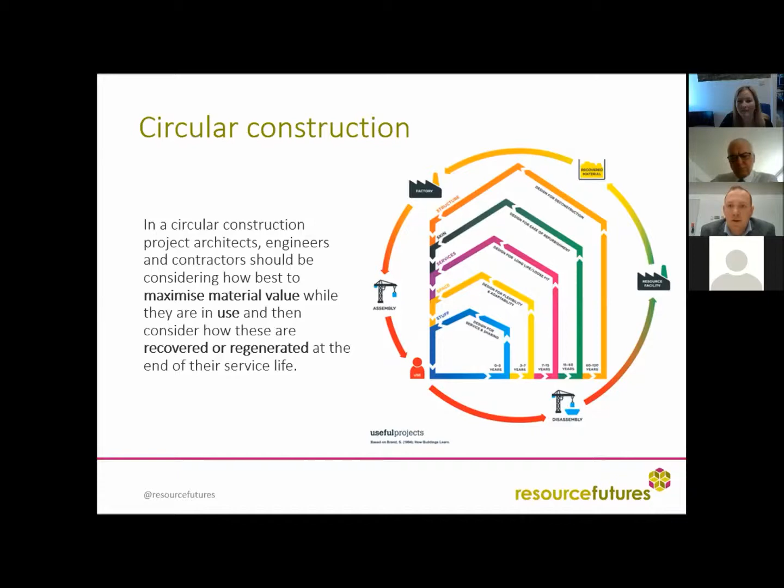Now, I could put up the standard butterfly diagram of circular economy, but I think probably everyone's seen that to death. But the message from that is recycling is considered to be the worst scenario, which is unusual. We normally think of that as something we should be striving for. But in a circular economy, recycling is almost the baseline. That's where we should be aiming to start as our fallback. Then we're looking at how can we recover that into a second life material? How can we repair it so that it continues within its existing life? And can it be reused in its current format as well? So that's moving up the waste hierarchy. And there are different opportunities for different materials and different layers in a building. So there is no single solution, unfortunately.

Why do we need it? Well, to quote Jan Poletsky of International Solid Waste Association, the 20th century has been the great acceleration period. Our population growth has been by a factor of 3.7. Our annual extraction of construction materials grew by a factor of 34. And alongside that, our greenhouse gas emissions grew by a factor of 13.

So what we're seeing is that we are building a lot more. Our population is growing, so we need to build to accommodate that. But we've not been very good at managing our finite resources in terms of, can we reuse materials? Can we make sure that they're closed loop and that we're not losing them into landfills? So we're getting faster and faster at building and consuming more and more materials, and eventually that bubble's going to burst.

So some interesting stats that he threw up. Globally, an area the size of the UK has been converted to buildings since 1990. And even more scarily, China used more cement than the entire USA in the 20th century in a 2-year period. Now, that's not to say that us in the UK, our impact is insignificant, or that we shouldn't be taking action just because China's so huge and their expansion is going to dwarf ours. What that shows is that globally this is a ticking time bomb.

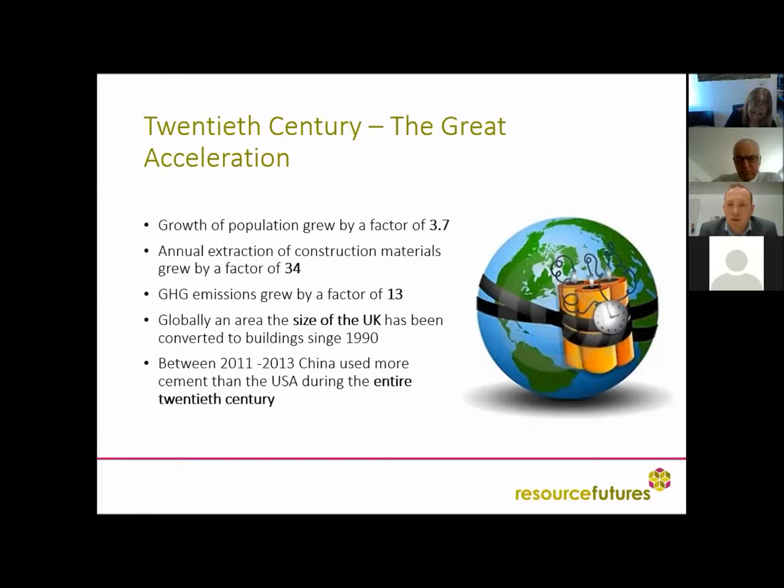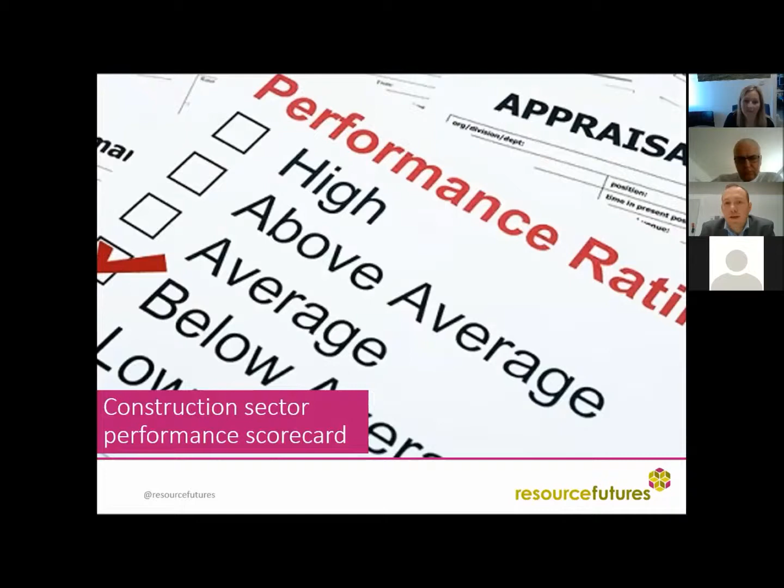We all need to play our part and lead by example. So we in the UK construction industry, as estates professionals, need to be considering what we're buying, how much of it we're buying, and how much of it we can conserve at the end of its use. So, as I said, my construction sector performance scorecard, I wanted to run through some of the key attributes of how globally, in the UK and in Europe the construction industry is performing.

So the first thing, material consumption. Well, as we've seen from the previous slides, we're not consuming less materials, we're only consuming more. Now that means that for every virgin product that's produced, there are greenhouse gas emissions produced with that. There is the embodied carbon impact of that product. So to simply say that we've got a tender out and a £15 million building, that is one stat, but the material cost of that building is perhaps something else we should be looking at for every project, in terms of the tonnage of materials consumed and the greenhouse gas emissions from those materials. Could we have chosen an alternative product, perhaps?

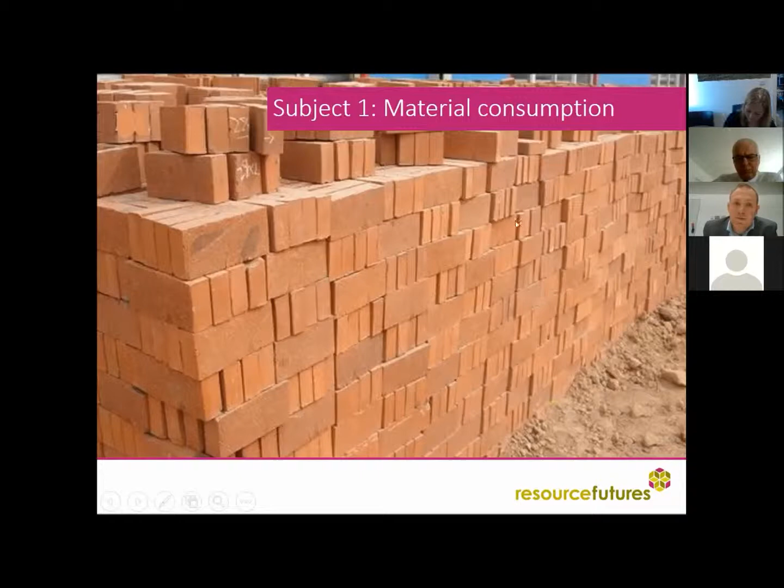So I'm afraid I'm having to give us a fail in the typical university fashion. I'm not sure it's quite as dramatic when students get that result.

The second one, as I mentioned earlier, material embodied carbon. The direction of travel is that materials are becoming more and more complicated and higher performance, so the greenhouse gas emissions involved in producing these materials are increasing as well. Globally we are predicted, I think, to consume over 300 megatons of carbon in the material consumption sector in the next 50 years. So if we don't start to think about this metric, not just the total tonnage of what we consume, but also how energy efficiently they can produce those materials, then that has a knock-on impact to the built environment sector.

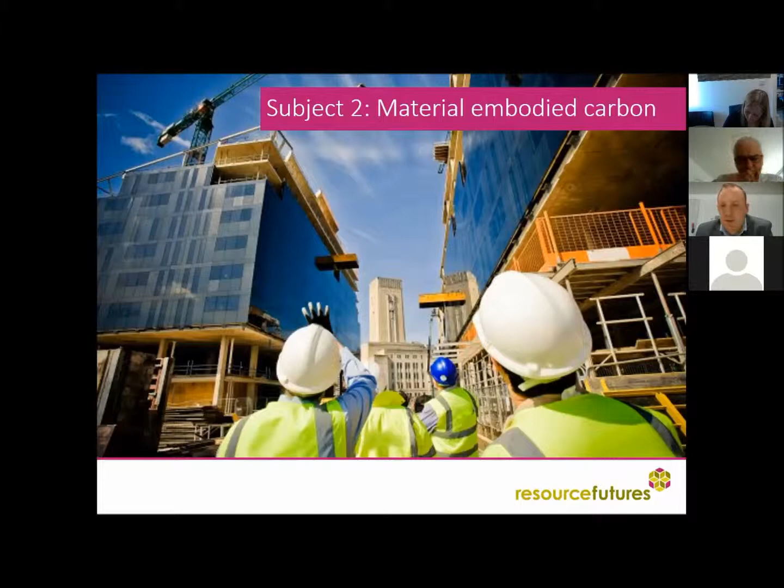So there are embodied carbon databases that exist. I would say that material manufacturers are not being pushed hard enough to provide that information to clients and to contractors. So we need to set the scene, we need to ask the question so that they are challenged to quantify what their embodied carbon impact is, so that when you buy those materials, you know the impact of it. So it is getting better, there are standard values out there, but in my opinion, this has not been pushed hard enough. So I'm afraid it's another fail at the moment.

In terms of waste generation, once we've consumed our materials, built our buildings and used them, we've got the waste produced in the construction process and the demolition at the end of life. In Scotland, construction waste accounts for 44% of the country's waste. Now that stat hasn't gone down over the last 10 years. So nearly half of the country's waste comes from our industry. And to be honest, we're the elephant in the room.

Now, we can focus on single-use plastics and cups and straws and all these things that are very high in the media right now, but for me, construction waste is too much of a given. The fact that we make 44% of the country's waste every year from this sector, and that's okay. Now, by weight, we will always be number one, unfortunately.

I doubt we're ever going to not be number one as a sector, but when you tip out a typical mixed waste skip and you find that 13% of what's in that skip is over-ordered, unused, brand spanking new material, and 26% of what's in that skip is packaging waste. Now, nobody wants to dispose of packaging waste, so why aren't we challenging manufacturers to take things back? Why aren't we challenging them to take excess materials back?

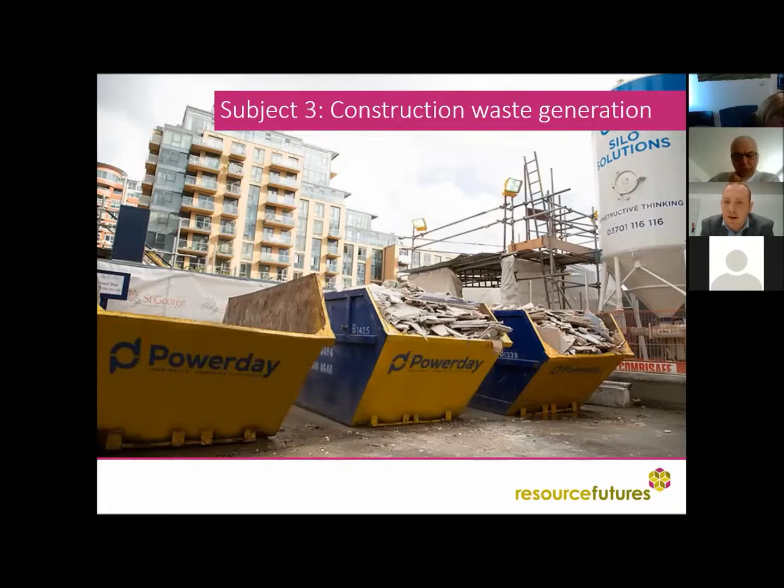There's a lot more that we can do. So I'm not saying that we will ever get to zero production of waste, but we're certainly not managing it as efficiently as we could. So again, it's another fail.

Construction waste recycling. So once we've produced this waste, what are we doing with it? As I said, reuse is pretty low at the moment, but recycling, we're actually in the high 90% recycling. But what I would say is that a lot of that waste is downcycled. To take glass as an example, glass returned back into glass manufacture is the best loop that we'd like to see from a carbon perspective. But often what happens is it gets crushed into aggregates. So technically it's recycled, but that's downcycling.

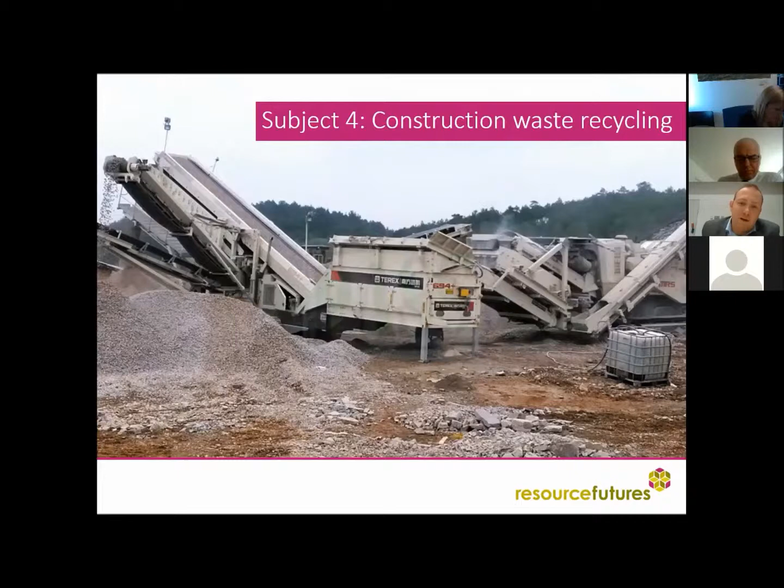So I've given a bit of a partial pass on this one. It's good that we are a high recycling sector, but is recycling always the right option? I think, as I discussed earlier, no, it's not, and we're not doing enough to promote reuse, and we're not doing enough to push waste prevention in the first place. So simply having a recycling target in contracts is actually hurting a lot of construction projects.

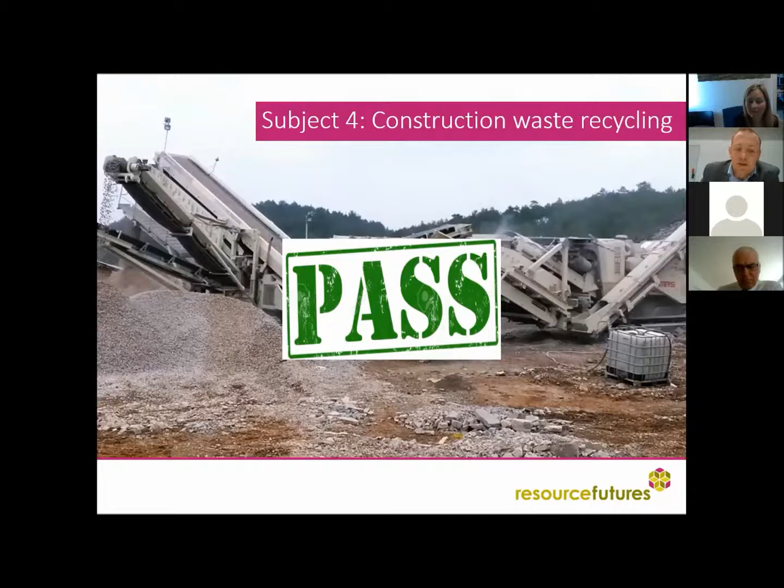Reuse is the fifth subject I wanted to touch on. As I said, I've been through construction waste skips and I've pulled items out of the skips that are worth £3,000 a pop, and there's two of them in there, and people have just thrown them away because it's easier to throw them away than it is to take them back and admit that you'd over-ordered in the first place. Now that lost value of the material production, the lost cost, the lost labour, as well as then having to pay to dispose of something, just doesn't sit very well with me.

We wouldn't go to Asda or other brand name supermarkets and then throw away 13% of what we purchased straight away, but that's what we tend to be doing in the construction sector. So reuse is another one that we're not currently doing enough with.

So I think my screen just disappeared there. Oh, there we go. So

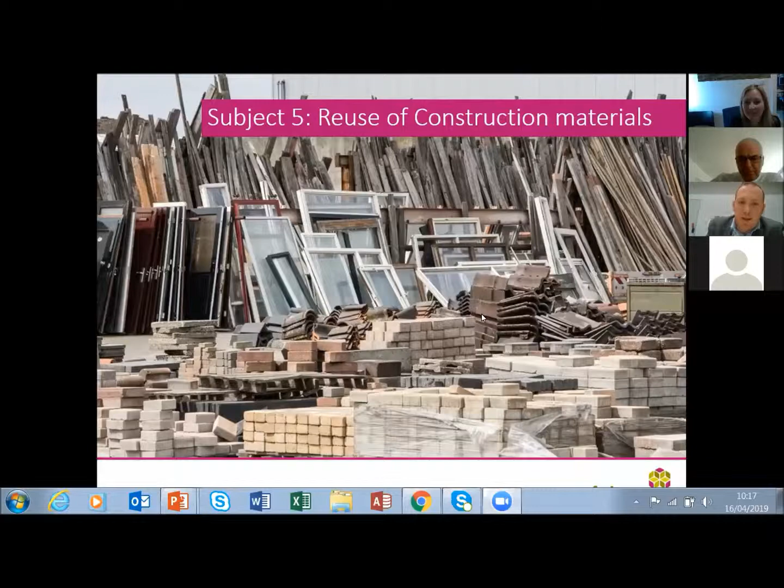Again, it's another fail for that one. So what can clients do? I think the first thing is realising that waste is your problem. It's not the contractor's problem, even though they're responsible for disposing of it. It is ultimately, from a duty of care point of view, the client's problem. It is that client's waste.

So what we have to do from a circular context is set the scene as clients. Now, I've put 4 steps here as what I expect clients to do. The first one is the UK Green Building Council has just published in the last month a circular economy guidance document for clients, because if I asked you right now, how do you implement circular construction? It's a difficult thing to do. This guide I would recommend highly as the first port of call.

It gives practical examples. It gives suitable guidance as to what the client brief should be, and also what the business case for doing this is, because ultimately the circular economy is not just from an environmental context. It has to be economic as well as environmental. So that's the first thing, read up on this good practice guide.

The second step, you don't need to be in Scotland to use it, but Zero Waste Scotland has a model procurement wording guide. That means that there are model clauses that you can drop in as a client to challenge your design team, to challenge your contractors to improve right the way from RIBA Stage A right the way through. And also those model clauses exist for the contractors and how they pass that responsibility down to their supply chain as well.

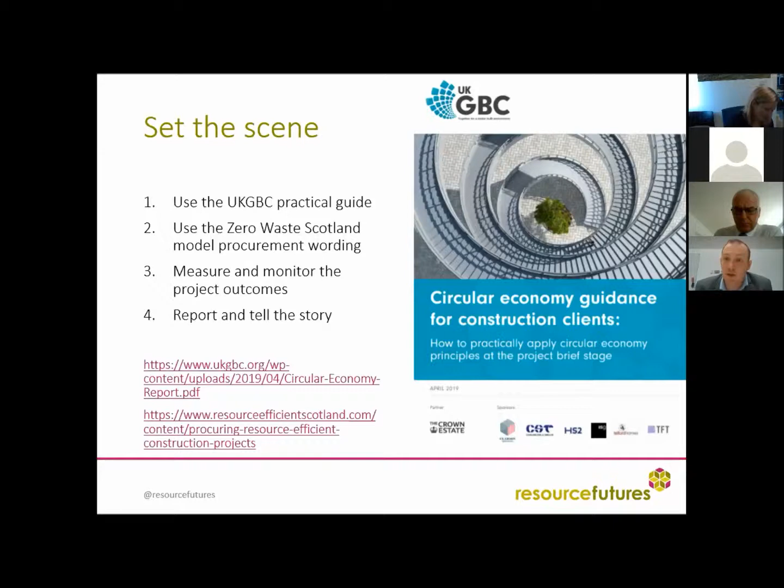The next thing that I wanted to touch on is I'm starting to go into the realms of what's not perhaps immediately possible, but is one for the future. Material banks, or buildings as material banks, is a new concept which is coming out of Europe, where you've paid £15 million for a building, and you've built that building, you're going to occupy it for X number of years, and then at the end of that building's life, you're going to refurbish it a number of times, and you're going to demolish it eventually or deconstruct it.

Now, the materials that you have in that building have a value. And is there a way of you designing that building at the beginning so that you can increase that material value? So if you could extract that material from the building in a format that allowed it to go to a higher value or a higher use recycling, that's worth more than just sending the wrecking ball through at the end at a demolition stage and you've lost that value. Now, it's the same with refurbishments. If you know what's gone into your building, over time, you can track that material and its value.

So a lot of people are exploring this concept just now, and they are trying to communicate the value of that to clients and asking contractors, you have all this information on the products that you've put into my building. Can you give me that in a way that tells me, almost like a savings account? I want a way of regularly accessing that bank account to see how much my building's worth. And because I asked the designers to design it in a circular way, I actually know that I can recover a huge proportion of that steel or those bricks or those plastics or that glass in 15, 20, 25 years' time.

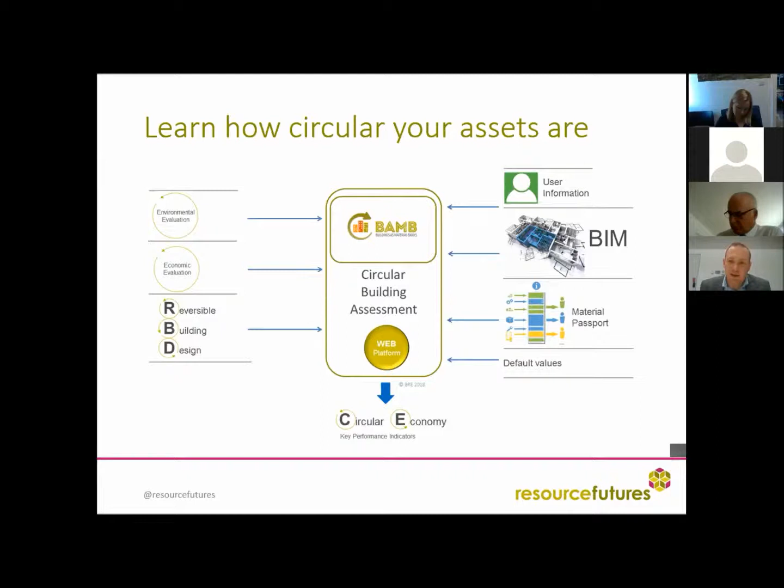I think we know our building estate quite well, and we know where we can improve, especially with new builds. That, for me, if we can't get this right with new builds, we'll never get it right to try and apply it to the existing estate. So that's why I do keep talking about new builds, but it's not uniquely linked to new builds only.

In Scotland, as I mentioned earlier, there is business support. So what I think as clients that we can all be smarter about doing is directing our resources and our bidders and our tenderers to say, you must work with Zero Waste Scotland. You must work with whatever free resources are out there, because I don't want to hear that you can't do it or that you've never done this before.

Because one, there is support out there to do it, and two, quite often your parent company has done it elsewhere in the world. It's just you've never been asked to do it in Scotland. So now I'm asking you to do it in Scotland, so draw on the resources. So in Scotland we have this circular economy business support.

Now whether that is you just being the facilitator of that and hosting an event that invites in the supply chain and says, we'll have Zero Waste Scotland talk about the free support that they have, or whether that's bringing in a consultant like myself and saying, help me set the brief and help me set the direction of travel and monitor and measure it throughout the project.

However you want to do it, I guess what I'm saying is that you don't need to be circular experts, the same way as I completely agree that you've got enough on your plate and your day-to-day job. But I think what I've been trying to talk about through this presentation is that building as we've always built, we can't continue that anymore. So we do have to change the way we're building and we're approaching these tenders.